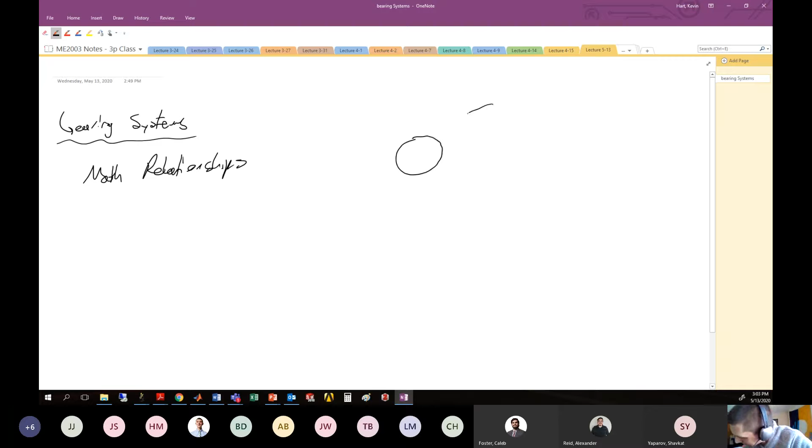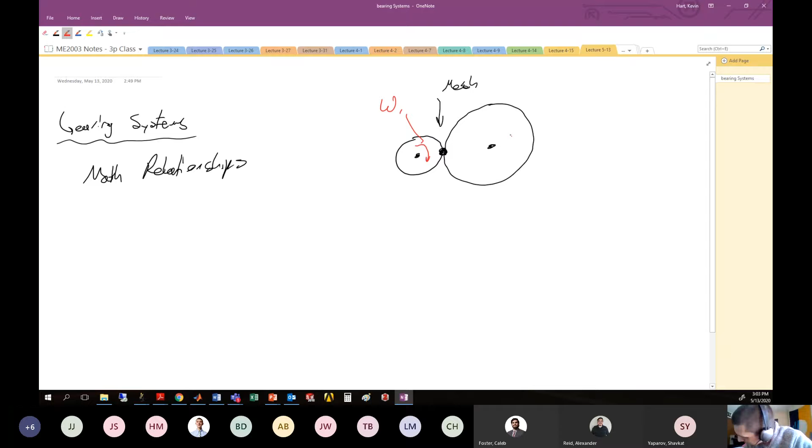All right, gearing systems. Last time we talked our way through the mathematical relationships behind gears. We had the most simplistic model to start, which was 2 gears connected in series: gear number 1 and gear number 2, connected at that particular point which we call the mesh. Gear number 1 pivots about its center, gear number 2 pivots about its center. This guy is rotating with some angular velocity, omega 1. This guy is rotating with some angular velocity, omega 2. These gears have radii of their pitch circles, R2 and R1.

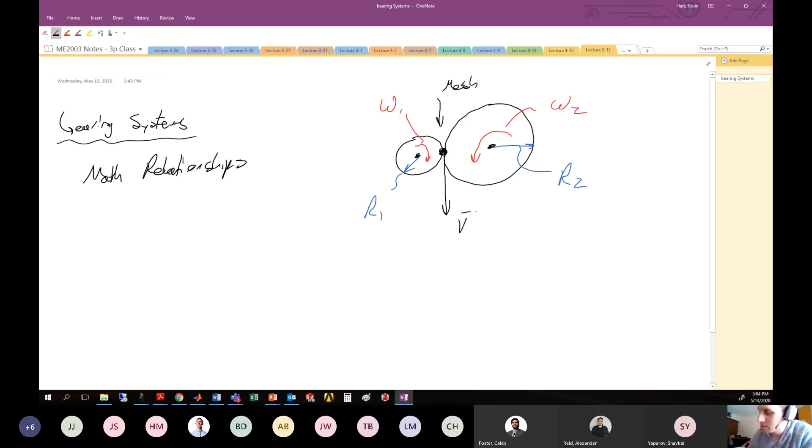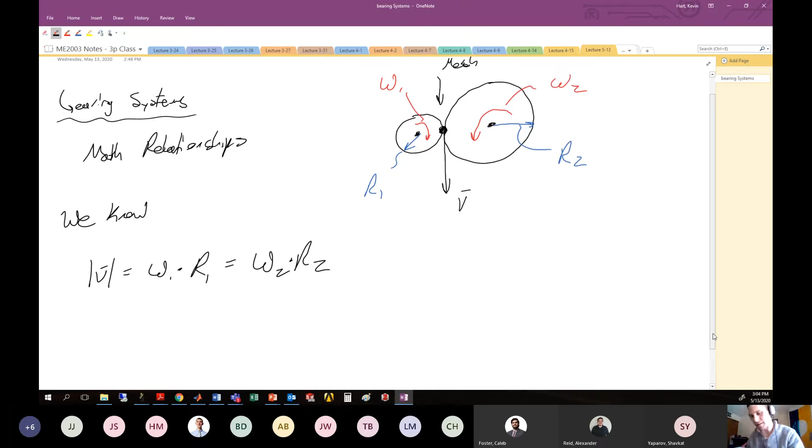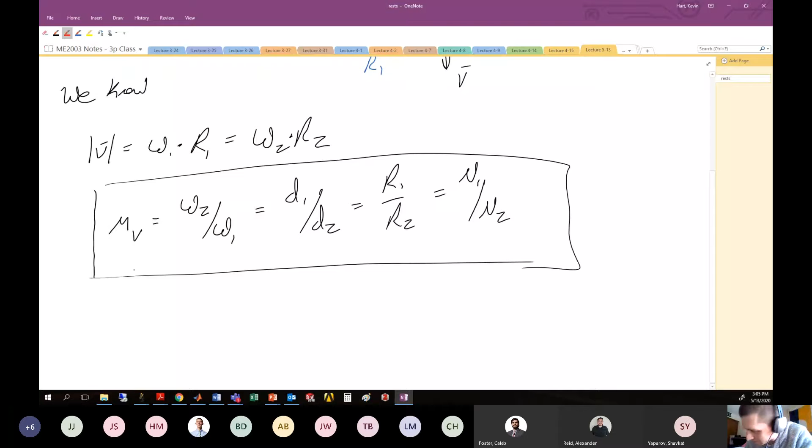We can rearrange and rewrite this to get a general relationship that exists between any 2 gears in mesh with each other, moving together. That is a relationship we call the velocity ratio - the ratio of the output angular velocity to the input angular velocity. So this is omega 2 divided by omega 1, which is the same as d1 on d2, which is the same as r1 on r2, which is also equal to n1 on n2. This is the basic information presented last class about relationships between 2 gears in a train - this is velocity ratio, here are your angular velocities.

Here is your pitch diameter, pitch radius, and here is number of teeth. So all these general relationships here now we have to work with. If I give you some information about the number of teeth and ask you for angular velocity, you can do that. If I give you information on pitch radius and the velocity ratio, you could figure out other stuff. All these relationships are useful when calculating between two gears in a train, the most simplistic relationships that we have. And these mathematical relationships we developed between two gears are the foundation for the fundamental law of gearing, tenet number 1.

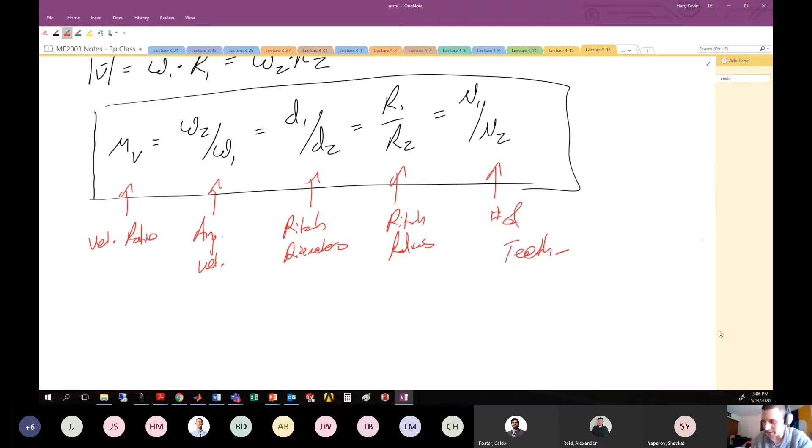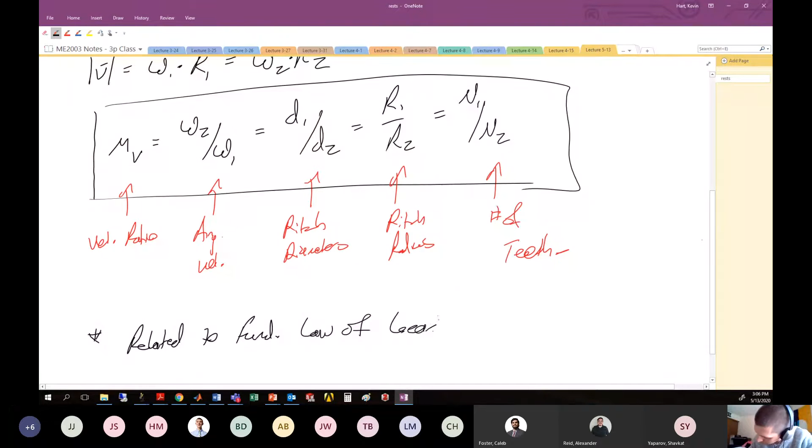Remember when we talked about the fundamental law of gearing, there were two tenets, and the first is related to the equation that we have here. So this is related to fundamental law of gearing, part 1. There's a second part that's not really of concern to us. It deals with the pressure line and pitch point and some things related to stresses on gears, which isn't really that important. So you saw it once, now dump it out the other side of your brain because you're not going to really use it the rest of this class.

So we made it to the fundamental law of gearing, part 1. We took this idea of two gears in a very simple train and extended it to, well, what if we have a bunch of gears that are in a line? We called that a simple gear train, and we developed a little bit more math from there.

All right, our train's getting a little longer. Choo, choo, choo. Rawr.

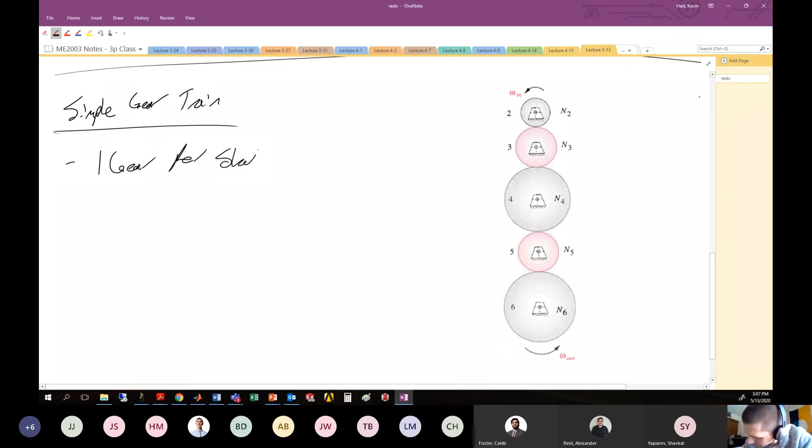And here was our simple gear train. Looks something like this. We had a bunch of gears in series. Each gear has its own shaft, one gear per shaft. This is not to be confused later with compound gear trains where we have multiple gears on the same shaft. We extended the fundamental law of gearing to the system of shafts by saying that the velocity ratio is constant between any two gears in the chain.

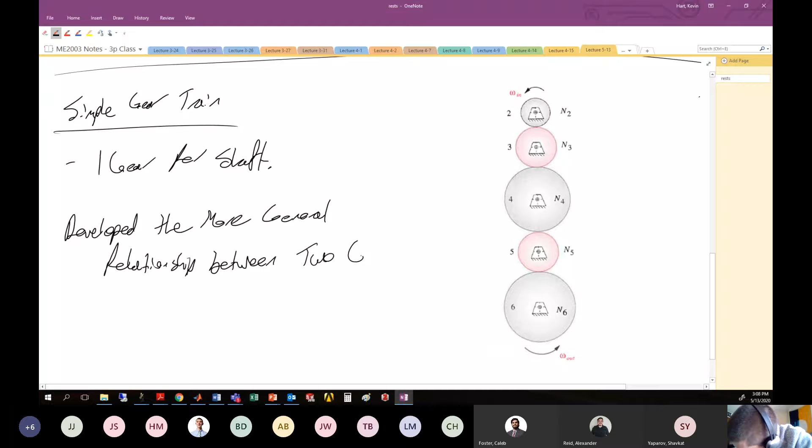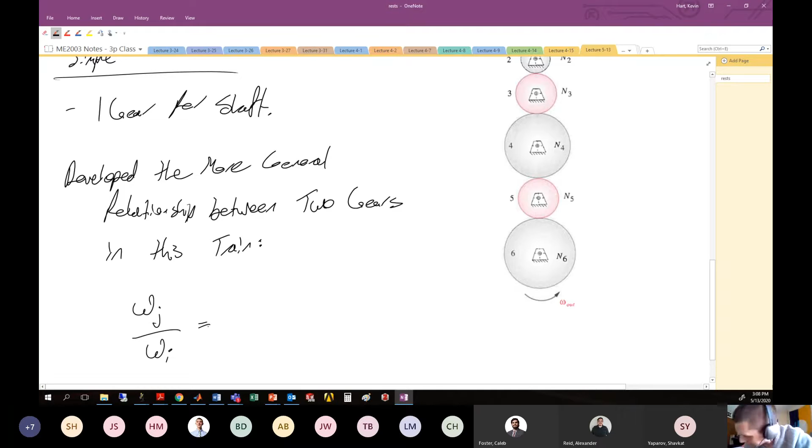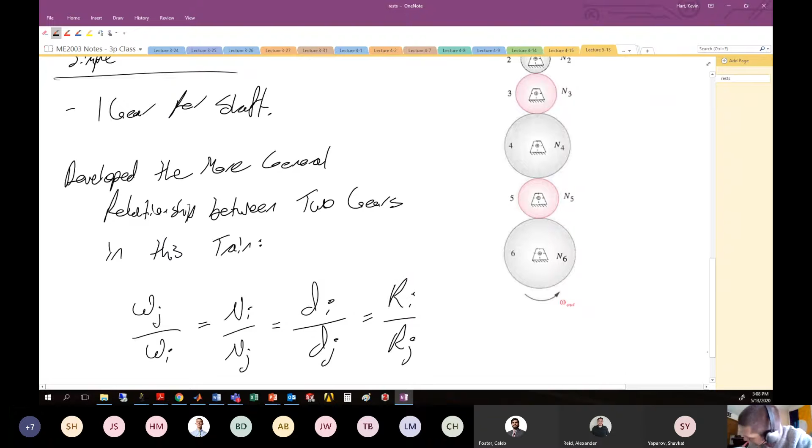So we developed the more general relationship between two gears in this train, which was that the angular velocity ratio between any two gears in the train, I and J, is related to the number of teeth or the pitch diameters of gears I and J. The angular velocity of gear J divided by the angular velocity of gear I is the number of teeth of gear I over the number of teeth of gear J, which is the same as the diameter of gear I divided by the diameter of gear J, same as the radius of I divided by the radius of J. So those relationships we developed for two gears in a train hold for a gear train that has many, many gears in this simple arrangement.

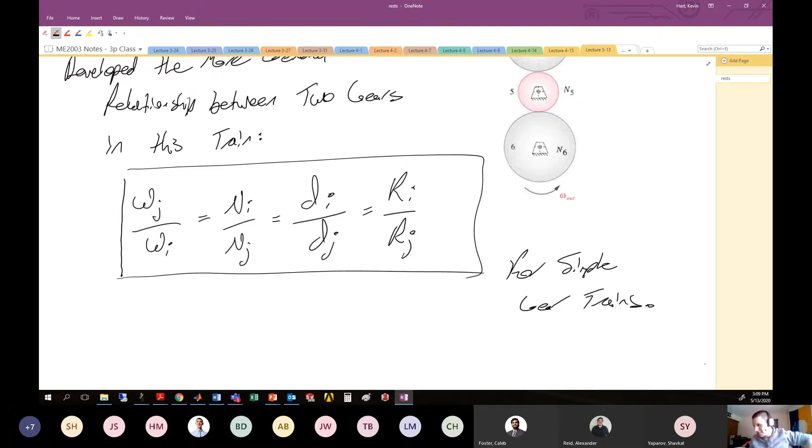So this is what we saw for simple gear trains. Now, in reality, those simple gear trains are almost never seen in practice. Rarely is it the case where you just have this series of gears that happen to coincide with some shafts that need to have output velocities related to the distances between them perfectly to get you what you need. That almost never happens. If it is, it's like a magical happening of engineering.

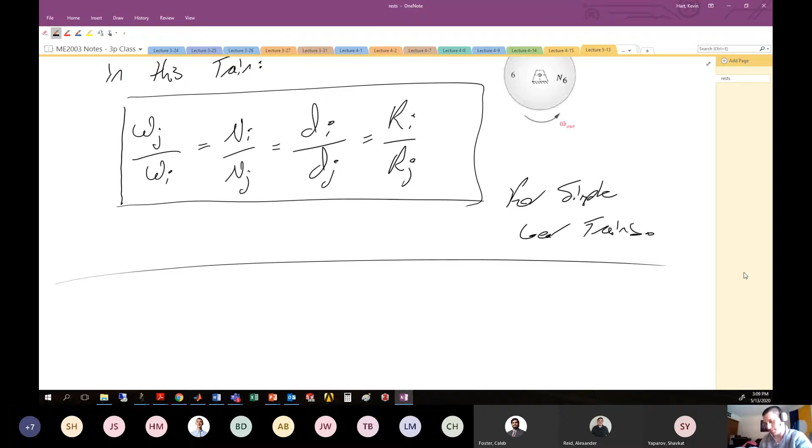So in reality, what we see in engineering more commonly are these compound gear train systems, which are potentially more useful. Some of the complicated or compound systems we see in real life begin with the math behind the simple compound gear train. So, compound gear trains.

Oh, it looks like I have a comment and or question. Hamburgers per pound gallon is better. Agreed.

So compound gear trains looked something like this, where now we have more than one gear per shaft.

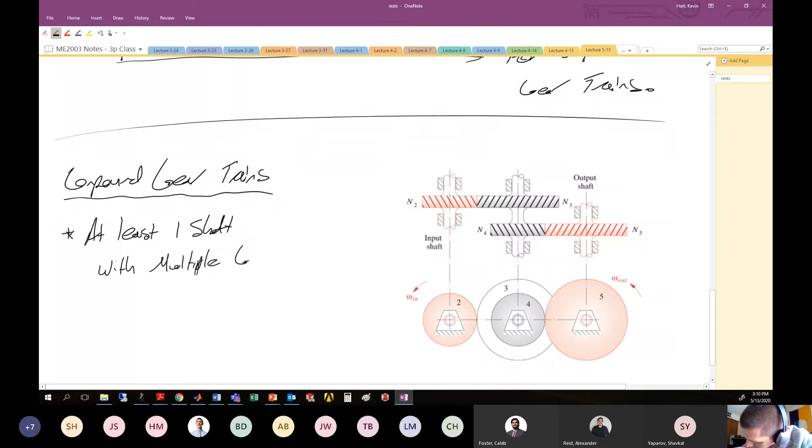So glad I don't have to draw this on the whiteboard. It's actually really nice to just be able to copy and paste this one in there, because believe me, trying to draw this on the whiteboard when I used to have to do it, oof. No, thank you. All right, it's my inner Jim Carrey.

At least one shaft with multiple gears. We see that here with this central shaft. It's got 2 gears on it, number 3 and number 4.

So what is the math behind this? The math has to do with the gears that are driving the system and the gears that are being driven. If we look at this compound gear train and think about number 2 as the pinion gear, the input shaft, it's driving the system, then we would say gear number 2 is driving gear number 3. So 2 is driving and 3 is driven.

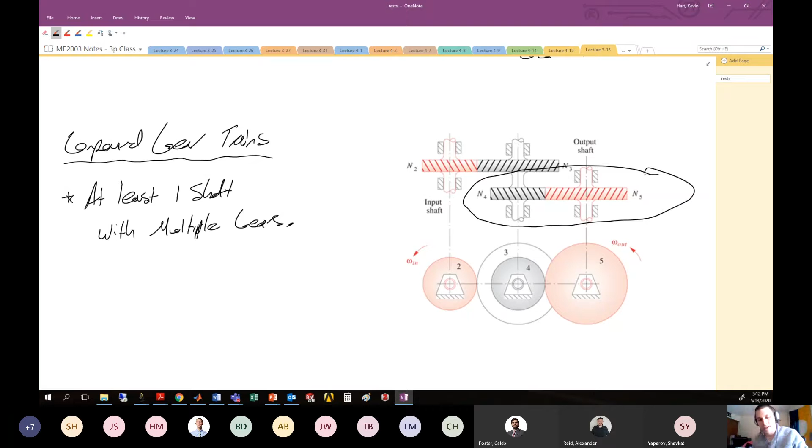That's pretty easy to see. There's always a driving gear and a driven gear. If we thought about removing the gears on the back end of this compound gear train and just looked at the system between 4 and 5, the same idea holds: one of them is driving and one is being driven. In this situation, 4 is the driving gear, and here is the gear being driven.

So again, it's like, I'm in control and I'm controlling you. If all of this stuff on the back end wasn't there, you'd have to pick which one is driving and which is being driven. But information from upstream, from gears 2 and 3, feeds into number 4. So it's like we're driving number 4, and then 5 is being driven from that information. So we have a series of gears driving the system and a series of gears being driven.

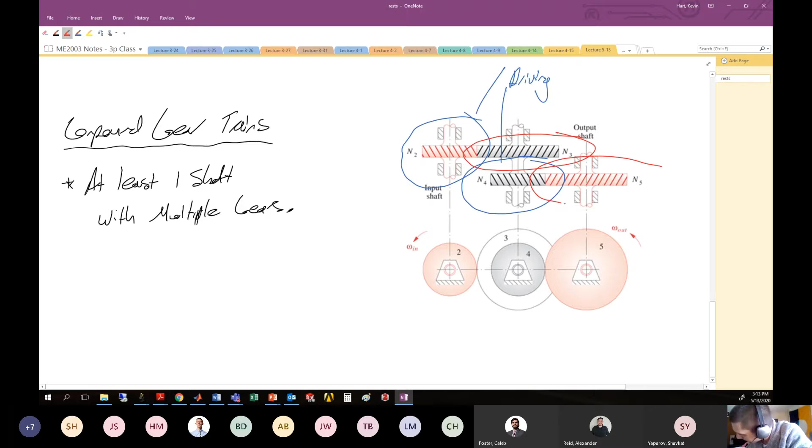So it's easy to see that 2 and 4 are driving, and 3 and 5 are being driven. At least that's how we would look at the general idea here.

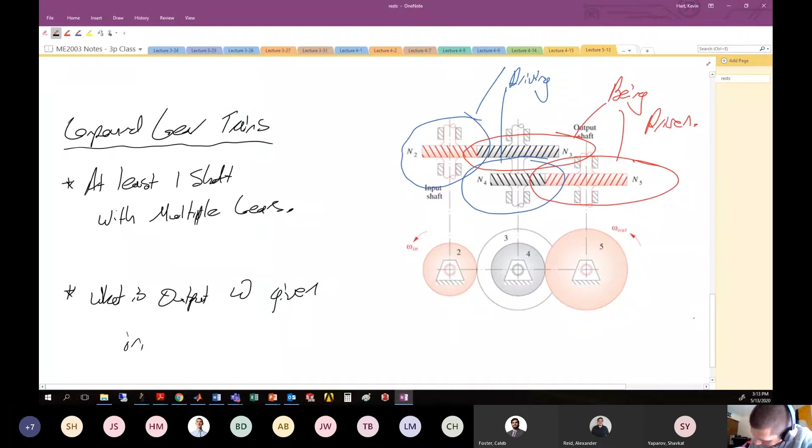So what we did when we brought this compound gear train into our analysis is we looked at what is the output angular velocity of this compound gear train given a certain input angular velocity? So what is output omega given input omega? Or mathematically, what is omega 5 given omega 2? This is what we were interested in doing.

We went through a bit of a rigmarole to show there's a special relationship for compound gear trains: the output angular velocity is the product of the number of teeth on the driving gears divided by the product of the number of teeth on the driven gears, multiplied by the input angular velocity. So we saw the relationship: omega 5 equals n2 times n4 over n3 times n5, times omega 2. Here this is number of teeth on driving gears, and here this is number of teeth on driven gears.

This is specific to our situation here, where we have a 2-stage compound gear train, one in the back, one in the front. But we can apply this general idea to all of these compound gear trains.

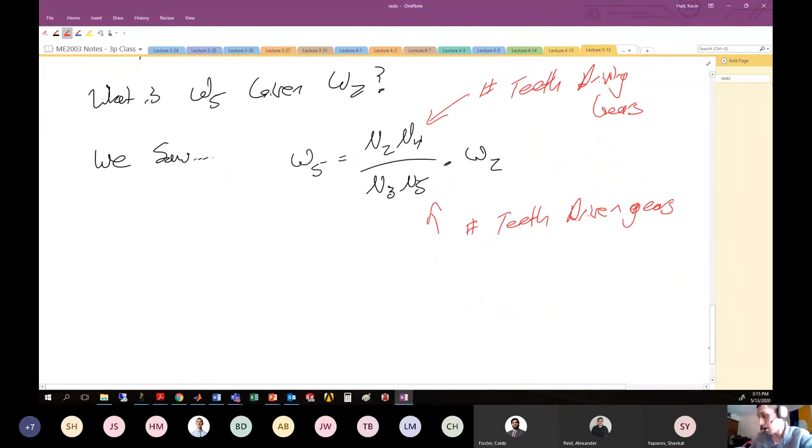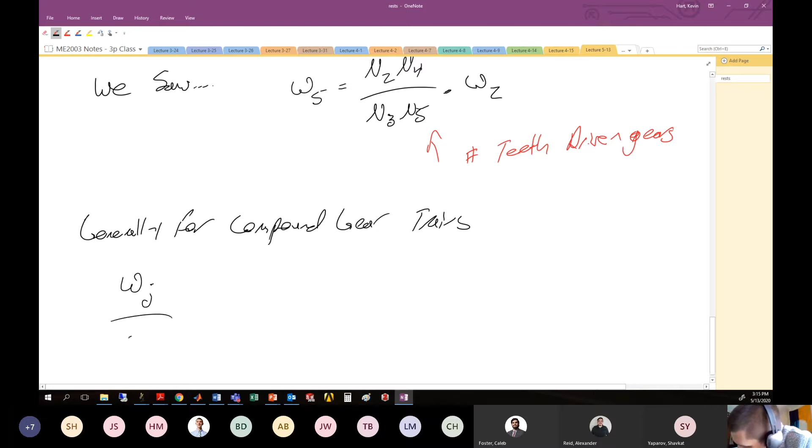So we said generally, for compound gear trains, we had something like the output angular velocity omega j divided by the input angular velocity omega i is the product of number of teeth of driving gears divided by the product of number of teeth on driven gears. This was a relationship that we found generally for compound gear trains.

So that's about where we left off last time. I know I did about 10 minutes of recap there, but I think it's good to get our bases before we attack a problem again. So let's do an example problem. We're looking at one of these compound gear trains, and let's make it a complicated one. We're going to bring in a 3-stage compound gear train and do the analysis here. Let's do that.

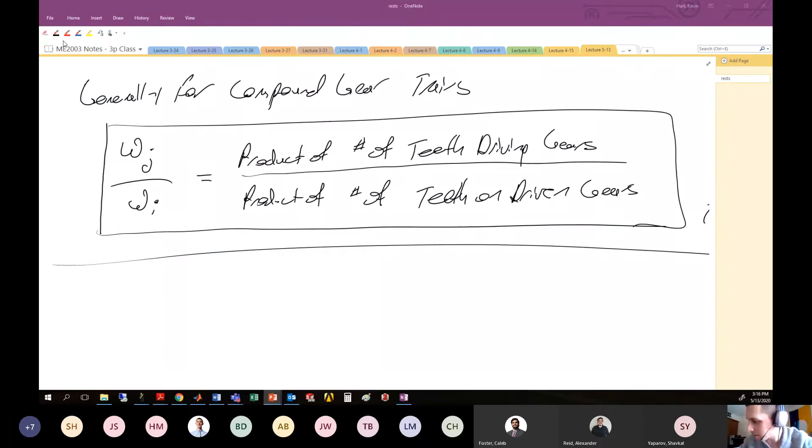We're getting crazy. But you guys can do it, all right? You're the smartest engineers in your chair, as long as no one else is touching your chair. Okay.

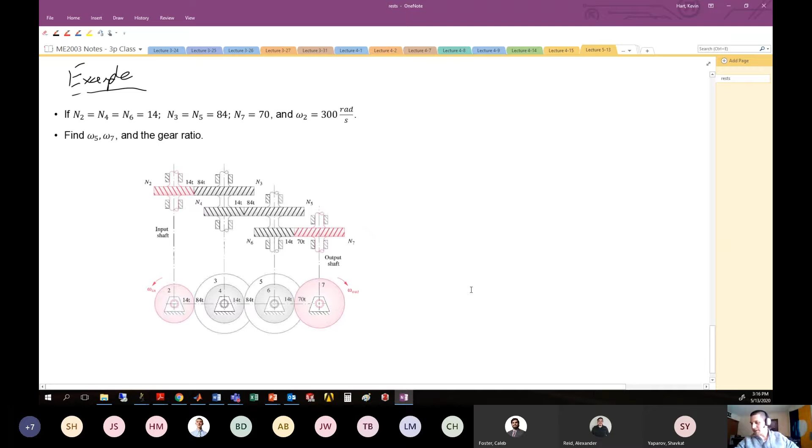All right, we're given some information here with this 3-stage gear train. So here's stage 1, stage 2, stage 3. It's a 3-stage compound gear train.

We're given information about the numbers of teeth on each one of these particular gears. So 2, 4, and 6 have 14 teeth, shown here with this lowercase t for each one of these driving gears. Remember, 2, 4, and 6 are driving the system. We see N3 and N5 have 84 teeth - it's like a whale shark. And N7 has 70 teeth.

So given information about the number of teeth on these gears and the input angular velocity, we want to find some pieces of information: specifically the angular velocities of gear number 5, gear number 7, and finally the gear ratio of this particular gear train. Makes sense - we want to know what we're getting out given what we've put in. Obviously, that's what engineers do.

All right, so let's do this. We know the relationship between the ratios of the angular velocities of any two gears is the product of the number of teeth driving the system divided by the product of the number of teeth being driven in the system.

Okay, so the first thing we want to do is identify which ones are driving, which ones are driven. So here, 2, 4, 6 are driving. 3, 5, 7 are being driven.

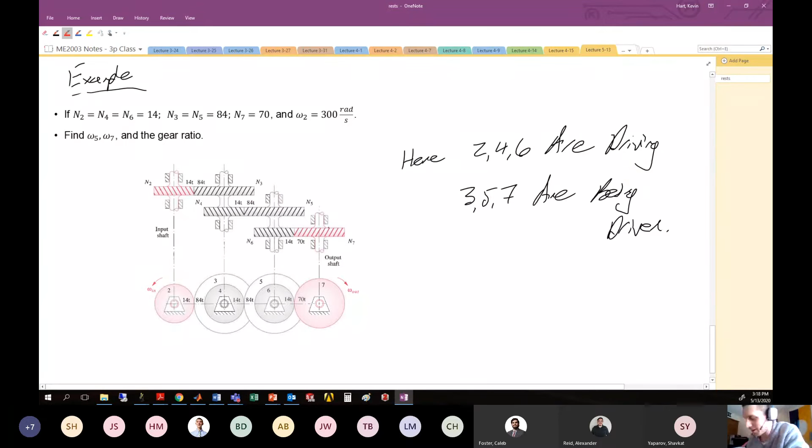And we could think about it by just looking at the individual stages of the compound gear train. If we got rid of all this stuff and just looked at this guy, well, 4 is driving 5. If we got rid of all this stuff and just looked at this one, 6 is driving 7. So 2, 4, and 6 are driving. The rest are being driven.

Now, the first thing we're asked about is omega 5. So we need to just isolate the first 2 stages of our system. So when we're looking at omega 5, we're going to isolate 2 through 5 - just the first 2 stages of this gear train. We're interested in what's going on with this guy. The angular velocity of gear number 5 is going to be the angular velocity of gear number 6 because they're on the same shaft.

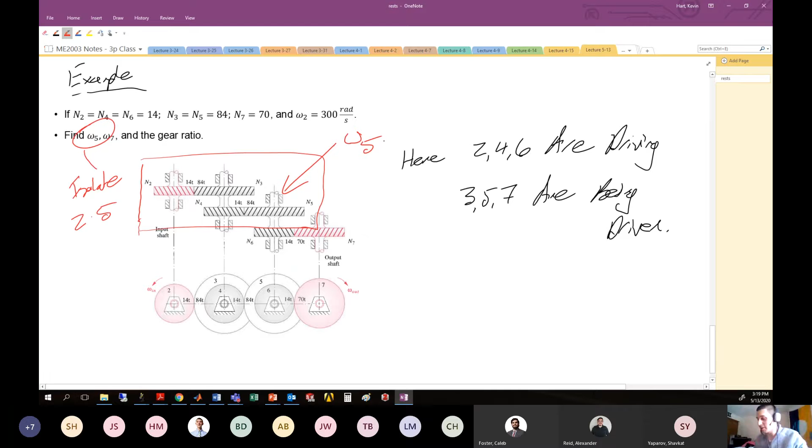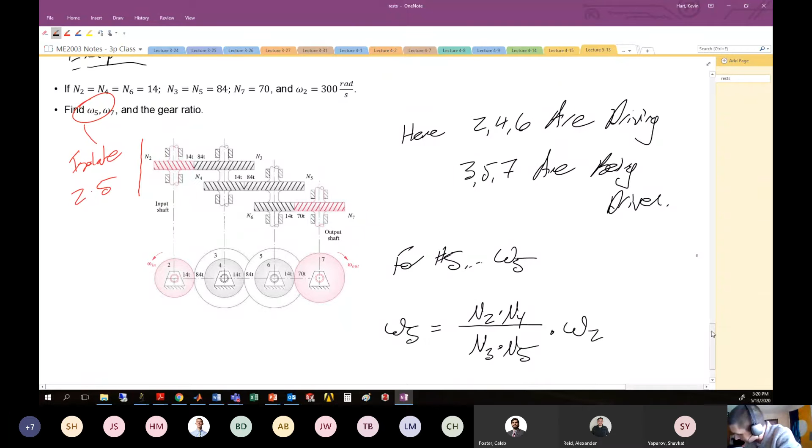So if we do that, then the general relationship to find the angular velocity of gear number 5 is going to be the product of the teeth which are driving to get to gear number 5, divided by the product of the teeth that are being driven up to number 5. It's going to be something like N2 times N4 over N3 times N5. You don't incorporate 6 and 7 because we haven't gotten to those in our gear train yet. This is all multiplied by the input angular velocity omega 2. So this is how we use this general relationship to come up with the angular velocities of the various components in this compound gear train.

Right, so this is easy. We can now just plug the numbers in because we have all of this. Omega 5 is N2 times N4. Both of these have 14 teeth, just like me and my cousins - 14 teeth for 2, 14 teeth for 4. N3 has 84 teeth, N5 also has 84 teeth given in the problem. They're whale sharks - 3 and 5 got a lot of teeth.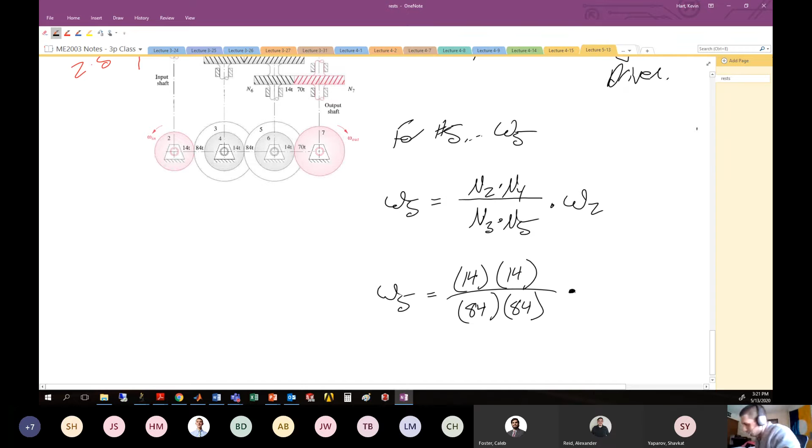And then omega 2 is given to us as 300 radians per second in the problem. So because of the relationships that we know with all these various teeth, etc., we get that the angular velocity of gear number 5 is 8.3...

Repeating, of course. Radians per second. That was a throwback to Leroy Jenkins. 8.33 repeating, of course. Anybody that gets that, wow, that's kind of a complicated joke.

All right, omega 5 is 8.33 radians per second. So we're putting in 300, and because of the arrangement of the teeth on our particular system, we're getting out on gear number 5, 8.33 radians per second. So pretty big step down in the angular velocities from 2 to 5.

Now we also want to know what is the angular velocity of gear number 7 in the train. So ultimately we want to figure out what is the angular velocity of this output shaft at the very end. So the same general idea is going to apply here.

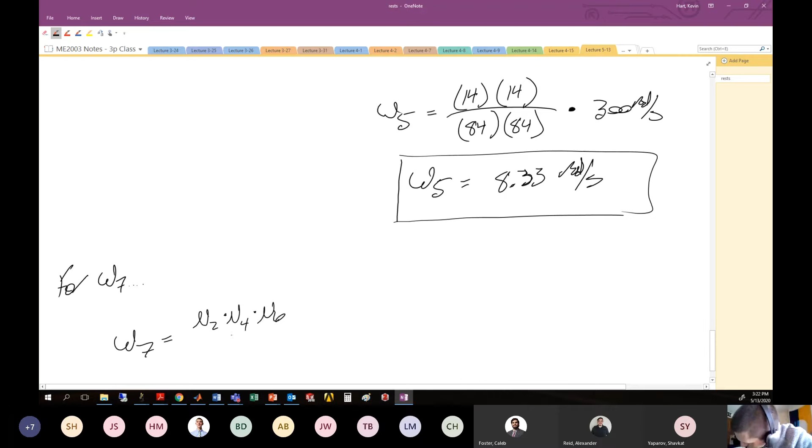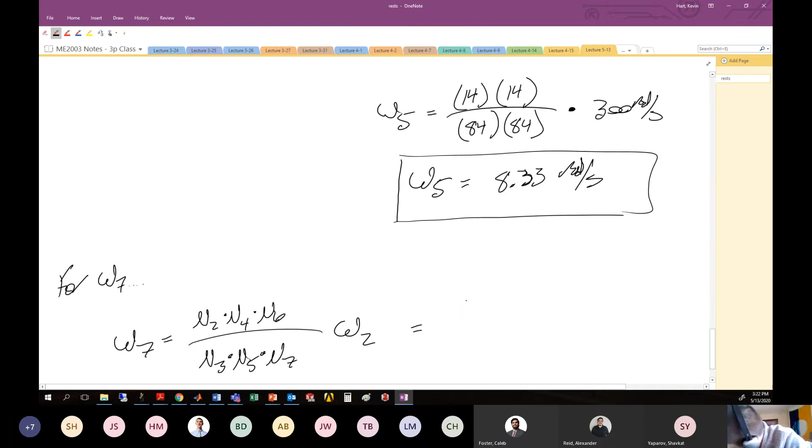Product of the teeth on the driving gears. Now we bring in 6 and 7 because they're now part of the chain. And away we go. 2, 4, and 6 all have 14 teeth, so I'm going to do 14 times 14 times 14. If you want to do 14 cubed, that's all right, I understand. And then gear 3 and gear 5 have 84 teeth, as given in the problem. And gear number 7 has 70 teeth. Why has it got to be so different?

He's a unique flower. Multiplied by my input angular velocity, 300 radians per second. Work this through, you'll get an angular velocity of the output shaft here. It's going to be 1.67 radians per second.

Whoa. Took my slider bar with me.

Okay, an interesting find. So because of the way that we've arranged this compound gear train, we're supplying 300 radians per second and getting out 1.67 radians per second. 300 on the input side, 1.67 on the output side. So we're reducing the angular velocity of the system by some factor. And the last part of the problem is asking us to figure out what is the factor of reduction of this angular velocity from the input to the output shaft, aka the gear ratio.

And remember, the gear ratio is the ratio of the input to the output. So here, the input is omega 2, the output shaft is omega 7. So the ratio of the input angular velocity to the output angular velocity is 300 radians per second divided by 1.67 radians per second, or you'll see here a gear ratio of 180, or more commonly reported as something like 180 to 1. It's a more common way to report the gear ratio. So this gear ratio here, 180 to 1.

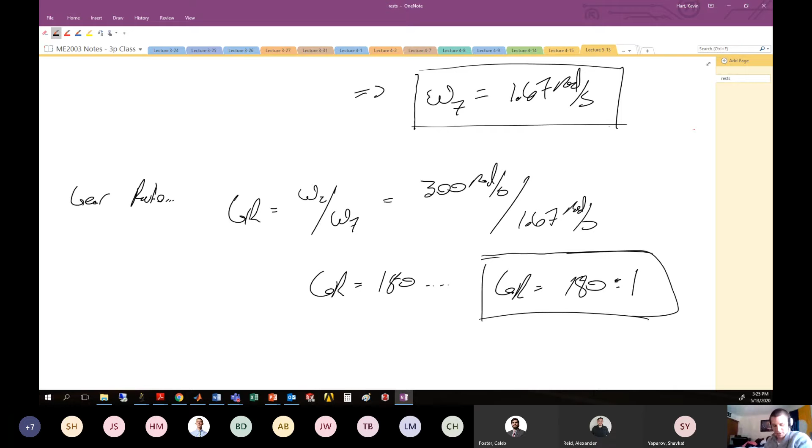We put in 180, we get out 1, or the linear equivalent of that. So if I put in 180 RPMs into my input shaft, I get 1 RPM in my output shaft. If I put in 360 RPM on my input shaft, I get 2 RPM in my output shaft, right? It's a general idea of the gear ratio here. Most people like to think about shafts and these gearing systems in terms of the gear ratio. It's the input divided by the output. And remember that the gear ratio is the input or the inverse of the velocity ratio. So I got to keep those two terms sort of separate from each other.

One final thing that I haven't really brought up yet and I want to talk about is sometimes you'll see in data sheets or in some gearing system catalogs a negative sign in front of the gear ratio. Your book doesn't use this nomenclature, but I'm going to do it just so that you're comfortable with it and you have seen it. And when you see a negative sign in front of a gear ratio, that means that the direction of the angular velocity of the output shaft is different than the direction of the angular velocity of the input shaft.

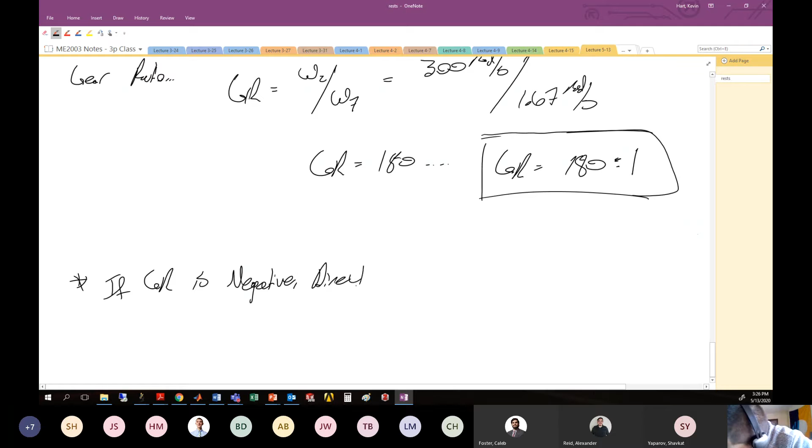So let me write what I mean in words. So, if gear ratio is negative, direction of output shaft angular velocity is opposite of direction of input shaft angular velocity.

All right, and I stick with this nomenclature through the homework and through the problems that I work. I think that's a good thing to do and get in the habit of it because it can communicate information appropriately. In the real world, a lot of people don't do that. So if someone tells you a gear ratio of 180, well, maybe the input and the output shafts are rotating in different directions, maybe they're not. You don't know, and you can't assume to know. But you know that the relative magnitudes of their angular velocity is that gear ratio. So that can be helpful.

Now let's look back at our problem and determine if we should use a negative sign here or not. All right, so we've calculated the gear ratio as 180 to 1, but do we need a negative sign or not to be appropriate? Let's look.

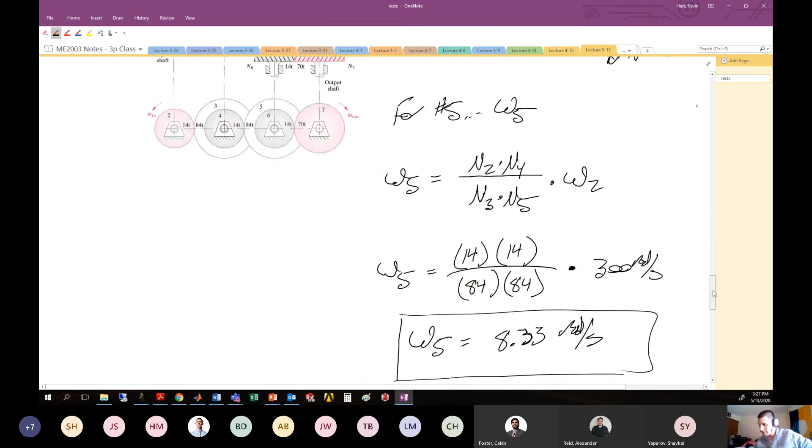All right. So here's our 3-stage compound gear train. And we're told that this guy has an angular velocity kind of in this counterclockwise rotational direction to start. So I'm going to assume and draw that here is my counterclockwise angular velocity for omega 2. So to match that, omega 3 has to be the opposite direction. Omega 4 has to be the same direction as omega 3 because they're on the same shaft. To match that, this shaft has to be rotating in this general direction. And then to counteract that, number 7 has to be rotating in that general direction.

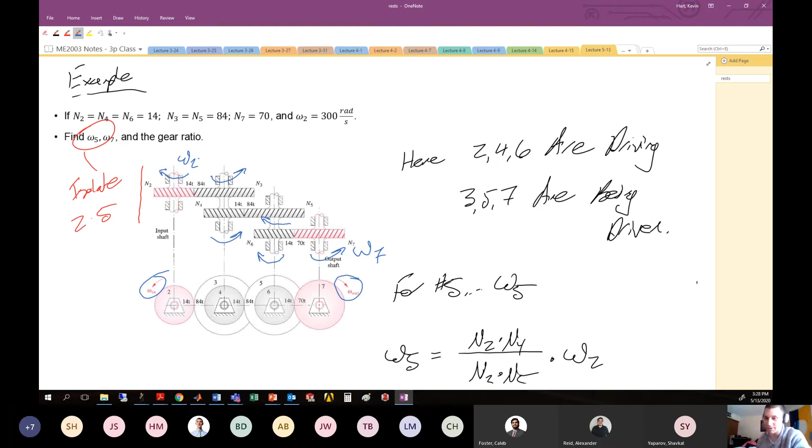Okay, so we have the output angular velocity here, the input angular velocity here. Notice that omega 7 and omega 2 have opposite directions in this particular gear train. So it would be appropriate for us to indicate that the gear ratio is negative because the directionalities of the angular velocities of the input and output shaft are in different directions. So it would be most appropriate for us to put this gear ratio here, not as it currently stands, but to include a negative sign in front.

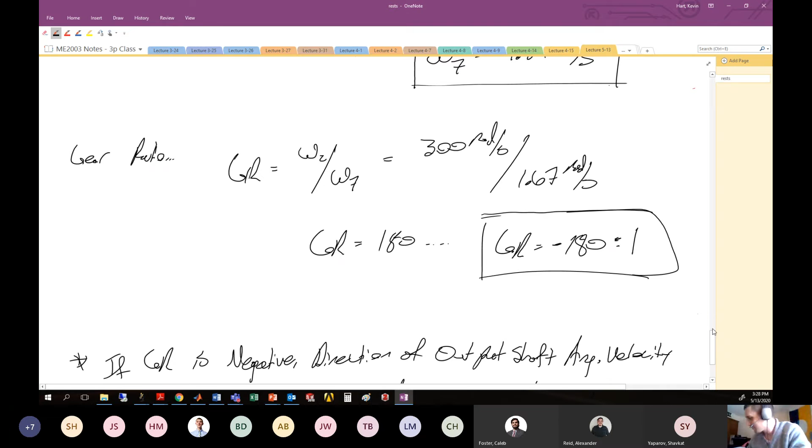Notice I left a little space there for the negative sign. Clever. All right.

So this is the appropriate gear ratio for this particular problem, negative 180 over 1. And that's because we're indicating to whoever is looking at our analysis that the output angular velocity is a different direction than the input angular velocity. And if you put in 180 RPM, you're going to get out 1 RPM in the other direction.

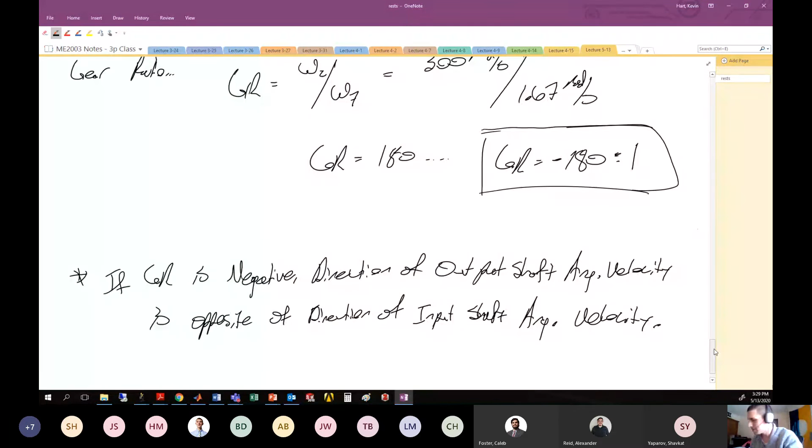Last thing I want to talk about is the most complicated gear train that we'll talk about in this class, though in real life, gear trains can be pretty complicated. And the last one that we're going to talk about in this class is the reverted compound gear train.

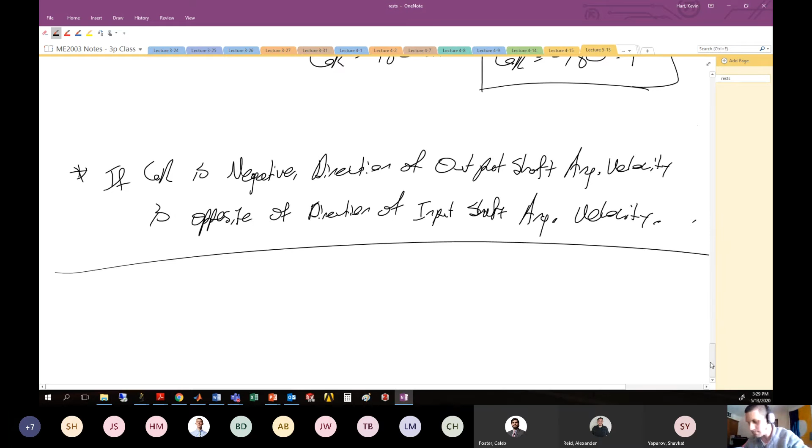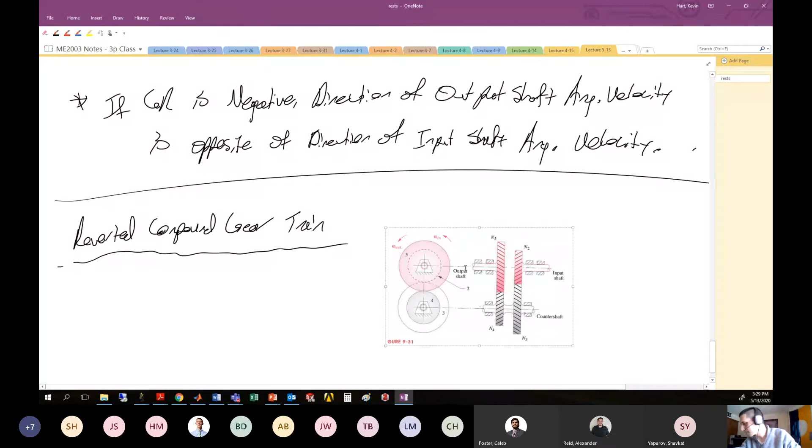All right, so here we are with our reverted compound gear train. Bam. Let's talk about what distinguishes this from just a normal compound gear train.

All right, I'll give you a second to digest this picture and kind of digest what's happening. All right, so here we have our input shaft. This is our input angular velocity that we're going to apply to this guy, and it's sort of driving this particular gear and shaft combination. That is going to drive this guy here, right?

This sort of second gear in the chain, given by N3, is attached to what's called the counter shaft. The counter shaft contains two gears on the same shaft, and so it counts as a compound gear train because we have two gears on that one particular shaft.

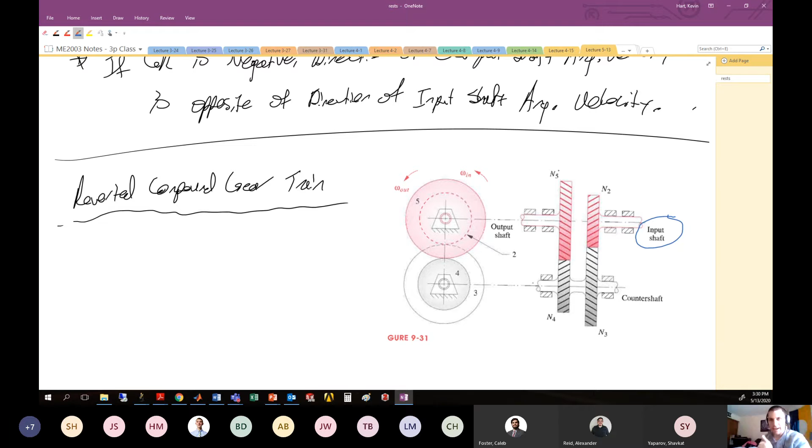Now, this counter shaft contains a second gear that will then drive a fifth gear in the series. And the reason you would want to make a reverted compound gear train is because the input and the output shafts are along the same axis. So we see that here in this particular picture. The input and the output shafts are both along the same axis.

This is particularly useful in quite a bit of engineering applications where you have one shaft that is rotating here and you need to slow the rotation of that shaft down along the same axis, right? Your automobile does this. Anyone that's driven a standard automobile, the transmission inside your car is using this general idea. There's one shaft that you're using to transmit all of your power, and the gear ratio that you're switching into, first gear, second gear, third gear, fourth gear, is giving you a different gear ratio between your input and your output shaft.

So when you switch from first gear to second gear to third gear, so on and so forth, what you're doing is you're switching the ratio of the gears in that counter shaft. Basically, you're taking the counter shaft currently attached to your main shaft, and switching it out for another counter shaft to give you additional changes to your gear train. All right, so this is the way automobile transmissions generally work. So counter shafts, important.

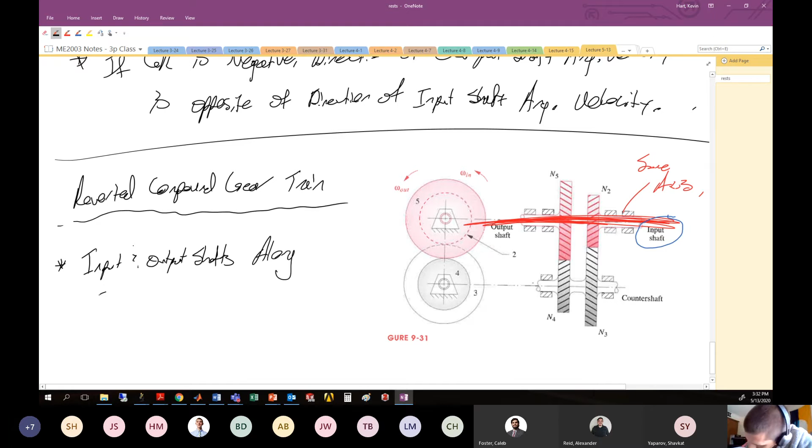So let's draw some definitions and put some stuff down on the paper here. All right, let's put ink to paper. Let's put pixels to paper. We'll say that these reverted compound gear trains' input and output shafts are along the same axis. This has uses in a lot of engineering applications.

Have you ever used a hand drill and twisted the little top on it that switches the speed of the drill? What you're doing there is you're changing the counter shaft gear ratio. You've got some motor power driving the drill bit, and when you switch that little switch on top that drives the drill bit, giving it a slower or faster speed, giving you more or less torque on your bit, you're basically changing that reverted compound gear train. You're switching out the counter shaft to give you more or less rotation on your drill bit, given the same input from the motor inside the drill.

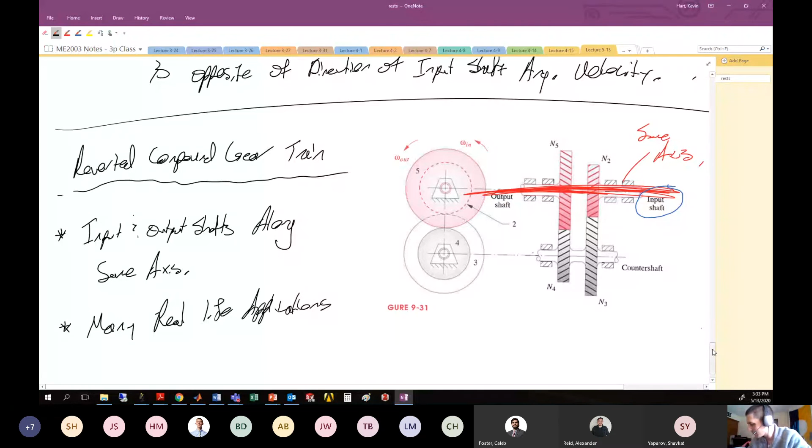All right, so some handy dandy little stuff there, very common in application. Input and output shaft along the same axis. If you make a reverted compound gear train, it's still a compound gear train, so the equations that relate number of teeth to input and output angular velocities that we talked about for general compound gear trains hold.

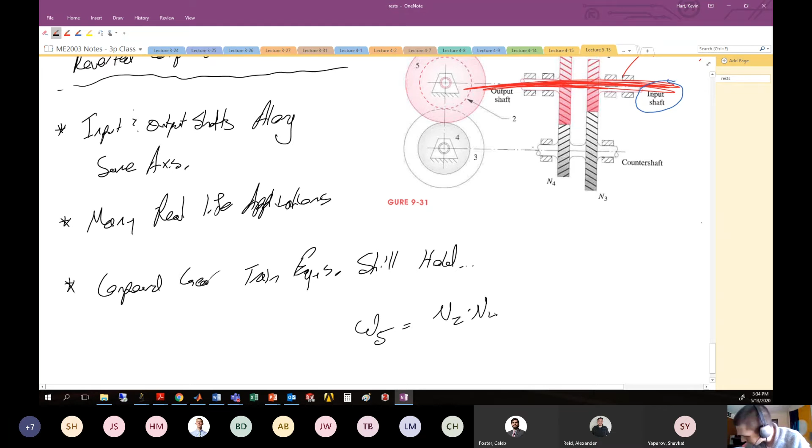Compound gear train equations still hold. So for this particular example, you have something like the output angular velocity omega 5 is n2 times n4 over n3 times n5.

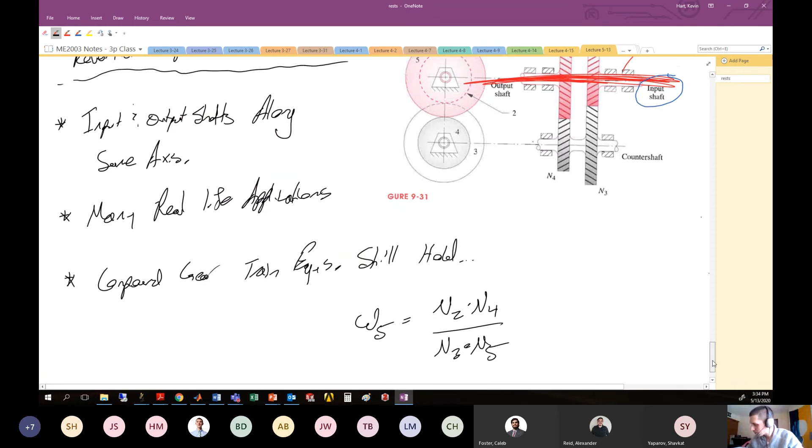2 and 4 are still driving, 3 and 5 are driven. So product of the teeth on the driving gears divided by product of the teeth on the driven gears, multiplied by the input angular velocity omega 2. That equation, still good. Just like the fish that's been in your fridge for 16 weeks, still good.

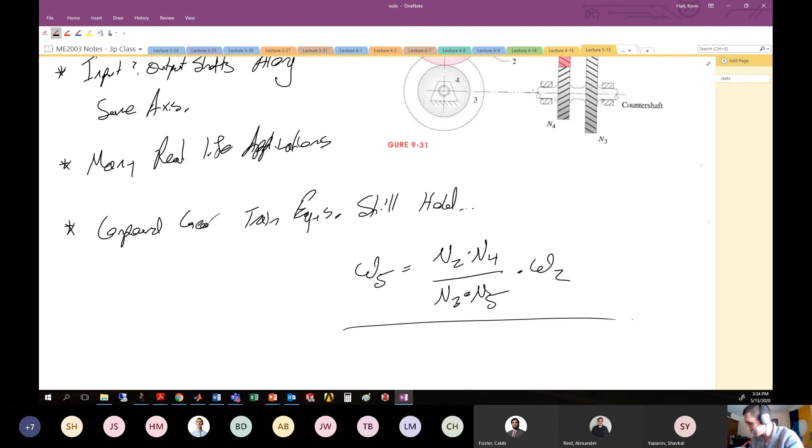There's one additional relationship that comes up when you have these reverted compound gear trains, and that is that the center to center distance between the two shafts must be consistent.

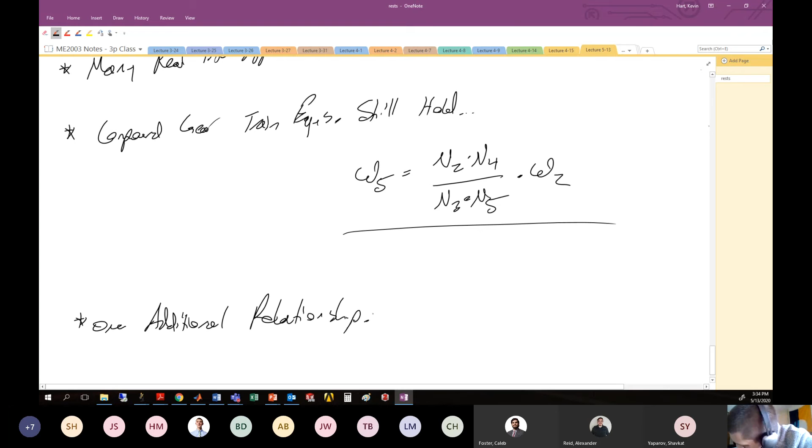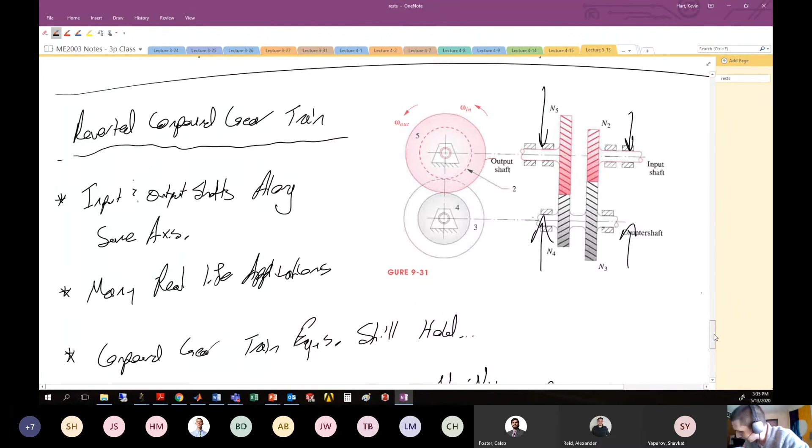The radius of gear number 2 plus the radius of gear number 3 has to be the same as the radius of gear number 4 plus the radius of gear number 5. These center-to-center distances must be the same. So the distance between the centers of gears 2 and 3 must be the same as the distance between gears 4 and 5. That's what we have with this general relationship here.

The radius of gear 2 plus the radius of gear 3 equals the radius of gear 4 plus radius of gear 5. This could have many forms, not necessarily just this relationship, but the diameters also have to have the same general feel.

If you substitute diametral pitch into this particular guy, it will cancel out, and you will still end up with something like this: N2 plus N3 is N4 plus N5. So there you go with your relationships.

If all same diametral pitch, this relationship holds. This is always true. This other relationship holds only if they all have the same diametral pitch.

Away we go. That just comes up because you need these shafts to be at the same distance apart. Otherwise, if one gear is bigger, this relationship would hold but some of the gears aren't touching each other. One of the sets is not going to be able to touch each other.

Let's see an example with this reverted compound gear train.

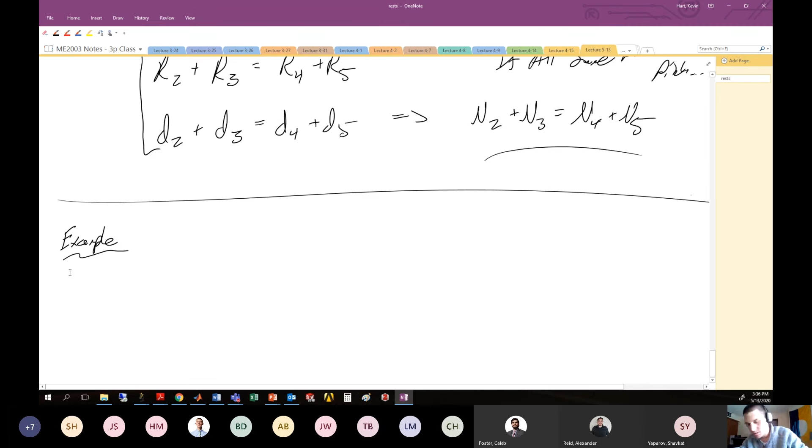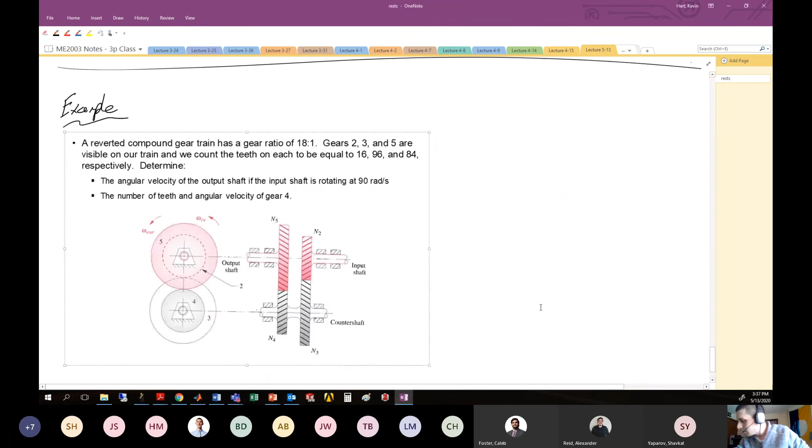Here we have a reverted compound gear train with a gear ratio of 18 to 1. Given information about this particular guy, that means an input of 18 gives me an output of 1, shafts rotating in the same direction input as they are at the output, because it's a positive value.

Gears 2, 3, and 5 are visible on our train, and we can count the teeth on each one equal to 16, 96, and 84. We want to determine the angular velocity of the output shaft if the input shaft is rotating at 90 radians per second, and the number of teeth and angular velocity of gear number 4.

So we're in some engineering situation where we can access gears 2, 3, and 5, but for some reason we're restricted and can't see what's going on with gear number 4. Maybe we need to know how many teeth are on gear number 4 so I can order some replacement parts and have some at the ready. We can use engineering to do the calculation. We don't have to bust this entire thing open to look at gear number 4. This situation happens in engineering all the time.

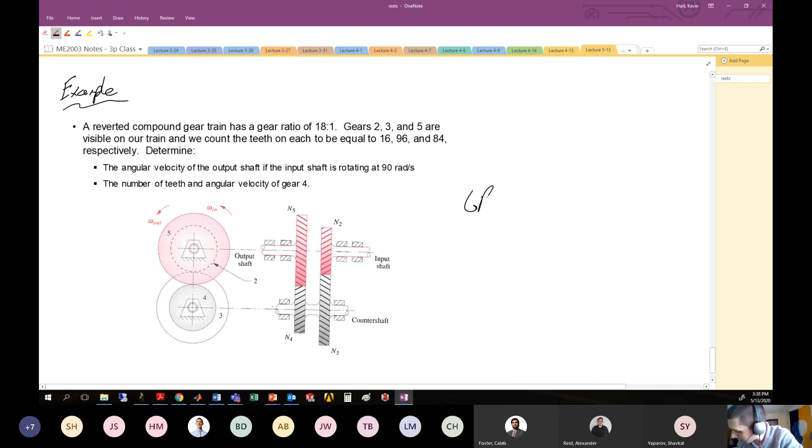So the first thing to notice is that the gear ratio is 18 to 1, and we're also told that the input shaft is rotating at 90 radians per second. Straight away, I can calculate the angular velocity of the output shaft because I have the gear ratio and the input angular velocity. Remember, my gear ratio is the ratio of the input angular velocity to the output angular velocity. So if I want the angular velocity at the output, that's just equal to omega 2 divided by the gear ratio. Here, the input angular velocity is 90 radians per second.

And the gear ratio is 18 to 1, or when we use it in calculation, it's 18. We get that the angular velocity of the output shaft is 5 radians per second. So we see here that we have a reduction in the angular velocity of this system. It's moving slower on the back end than on the front end.

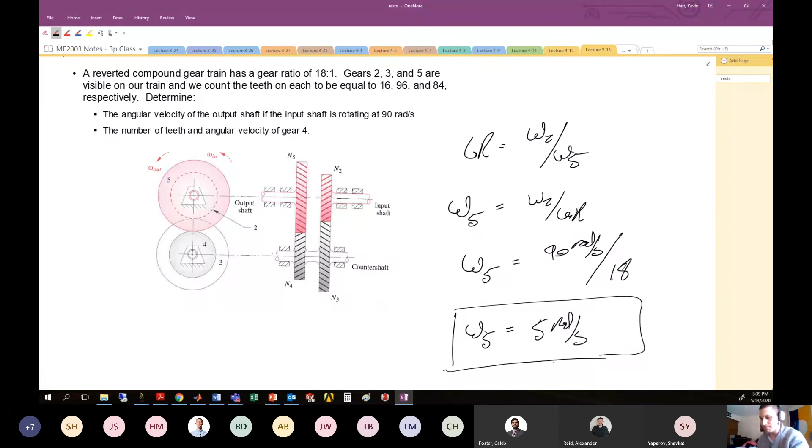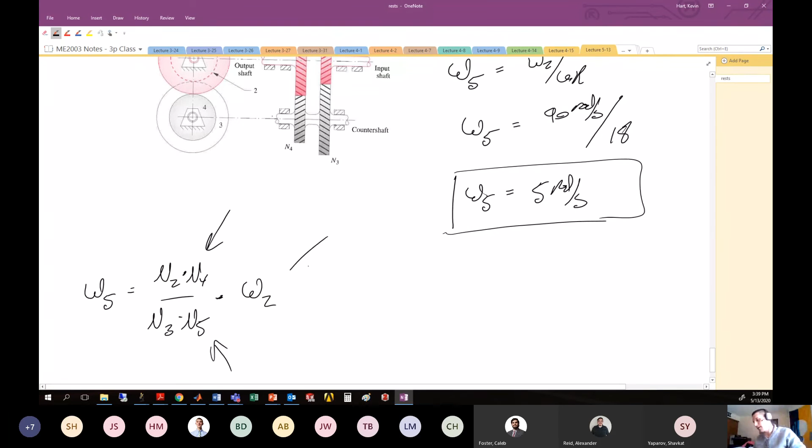Now, we also want information about the number of teeth and angular velocity of gear 4. We can use our compound gear train relationship that says omega 5 equals n2 times n4 over n3 times n5, multiplied by the angular velocity of the input shaft, omega 2. Driving gears, driven gears, input angular velocity. It's a general relationship we'll see over and over. The only unknown in this situation is the number of teeth in gear number 4.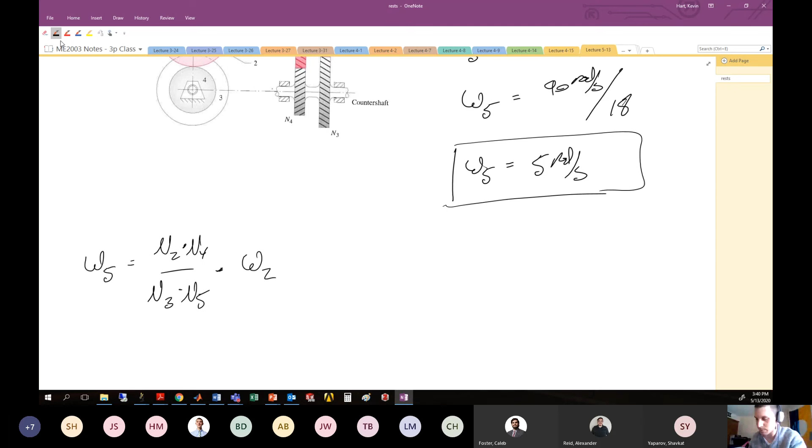We just solved for omega 5. Omega 2 is given to us, and we know all the teeth on 2, 3, and 5. So we can solve for N4 by plugging things in directly. Let's plug it in. Omega 5 we just calculated as 5 radians per second. You could also identify that omega 5 divided by omega 2 is the gear ratio, or the velocity ratio.

Number of teeth on gear number 2 is 16. N4 is our unknown. Number of teeth on gear number 3 is 96. Number of teeth on gear number 5 is given as 84 in the problem. This is multiplied by the input angular velocity, which was 90 radians per second. We can solve this and determine that the number of teeth on gear number 4 is 28.

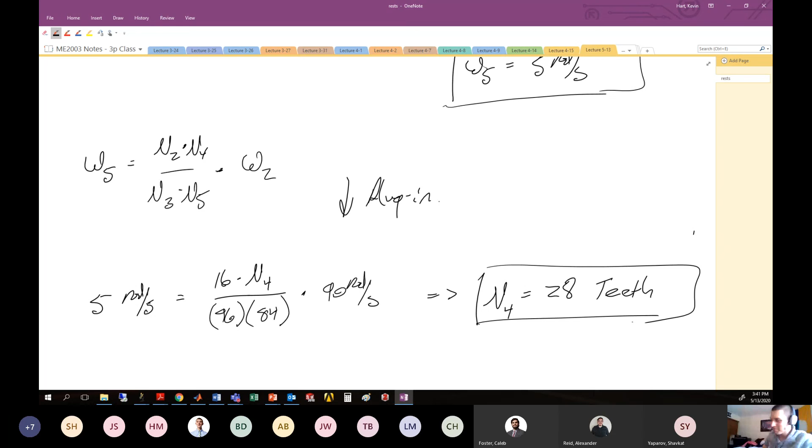If you're doing calculations on a test or homework and you get something like n equals 0.7, you done messed up, all right? You're not going to have a gear with 0.7 teeth. Maybe your first cousin from West Virginia has 0.7 teeth, but you ain't got any gears with 0.7 teeth, all right?

So this gear has 28 teeth. The last thing we're asked about for this problem is the angular velocity of gear number 4.

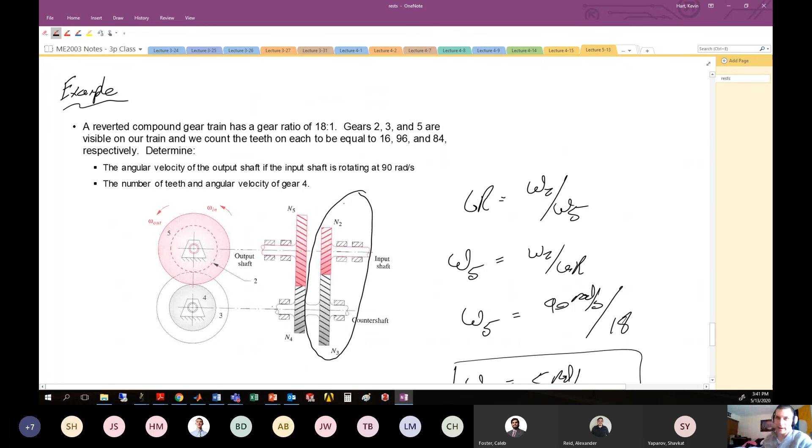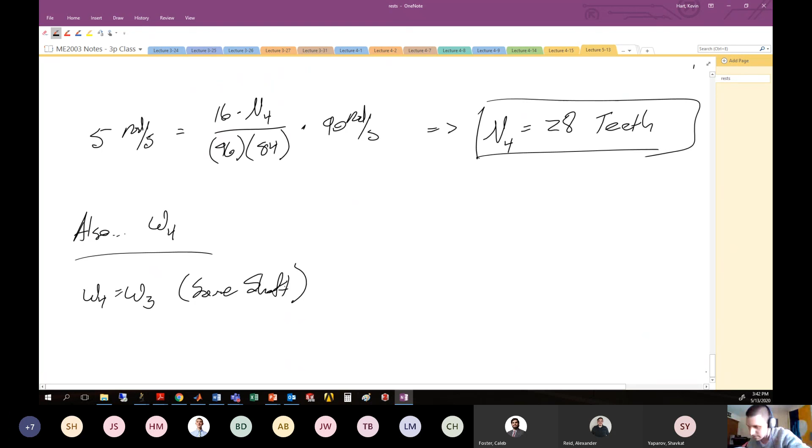We also need this angular velocity. Because gear number 4 is attached to gear number 3 on this counter shaft, we know they're going to share an angular velocity. So really the only analysis we need is between N2 and N3, because if we figure out the angular velocity of gear number 3, we've figured out the angular velocity of gear number 4, since they're on the same shaft. Omega 4 equals omega 3, because same shaft.

Let's do our analysis between gear 2 and 3. Our general relationship here holds when we're looking at the relationship between two gears in a train, and that is omega 3 divided by omega 2 is N2 over N3. It's our first fundamental law of gearing. We have all this information except omega 3, so we can rearrange to get omega 3 equals N2 over N3 times omega 2.

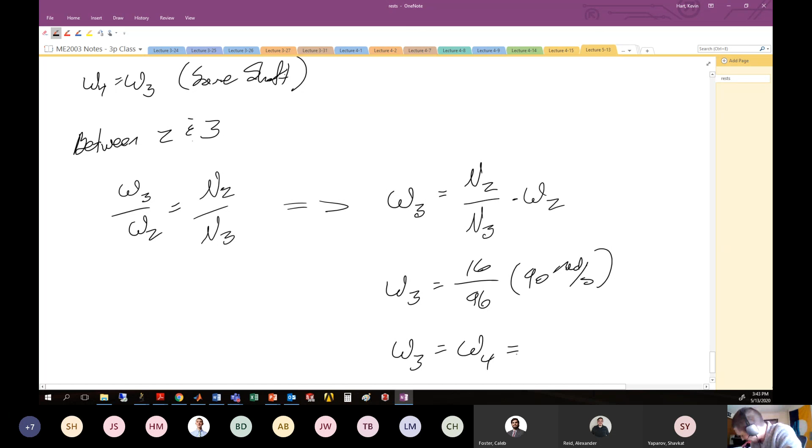Number of teeth on gear number 2 is 16. Number of teeth on gear number 3 is 96. And omega 2, given in the problem, is 90 radians per second. So if we're interested in the angular velocity of gear number 3, which is the same as the angular velocity of gear number 4, this can be calculated as 15 radians per second.

There you go. Algebra, pretty easy for these guys. You just have to understand the relationships between all of these: the gear ratio, the velocity ratio, number of teeth, pitch diameter, diametral pitch. These vocabulary words mean things mathematically that you have to be ready to use and execute.